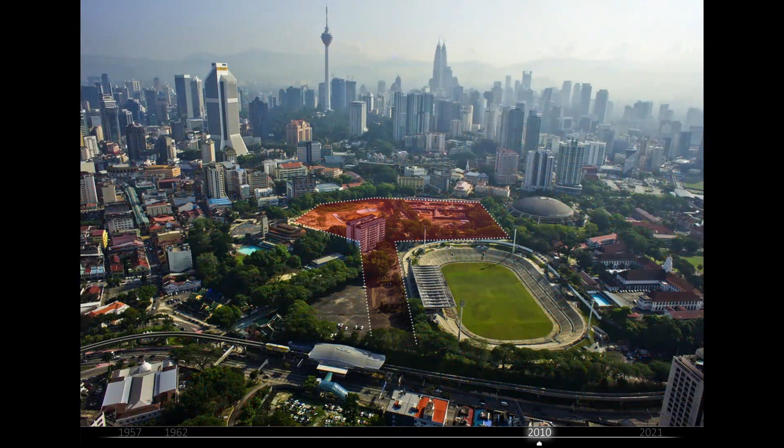But even more important to our story is Stadium Merdeka a bit further away. You'll notice it has the same name as our tower. You see that in 2010 the area was a little bit neglected for such a significant place in Malaysia, because Stadium Merdeka is where in 1957 Malaysian independence was proclaimed.

The first Prime Minister, Tunku Abdul Rahman, raised his hand to declare the birth of the nation, and our tower is meant to celebrate and symbolize this moment in the country's history. And that's why, same as the stadium, it is called Merdeka, which means independence.

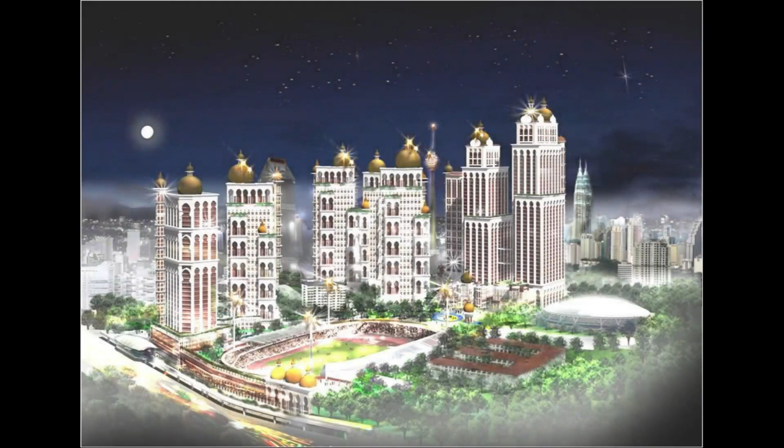Some early schemes were done for the site before us, traditional Islamic campus style, but that's not what the client wanted. The client wanted a bold statement about a modern nation going into the future, and our client is one of Malaysia's most important companies, PNB, Permodalan Nasional Berhad.

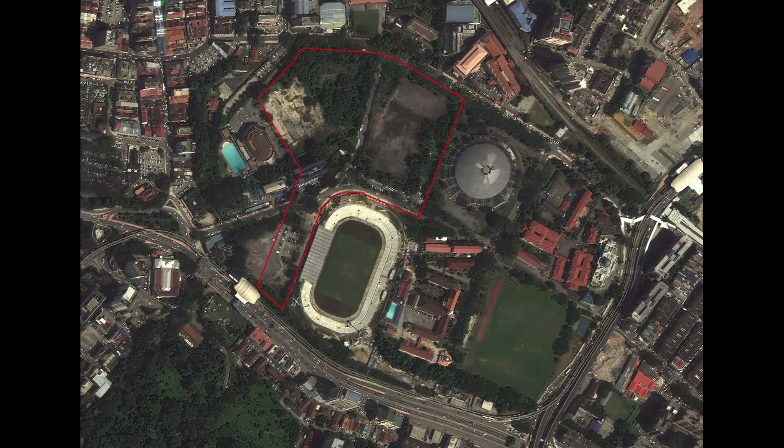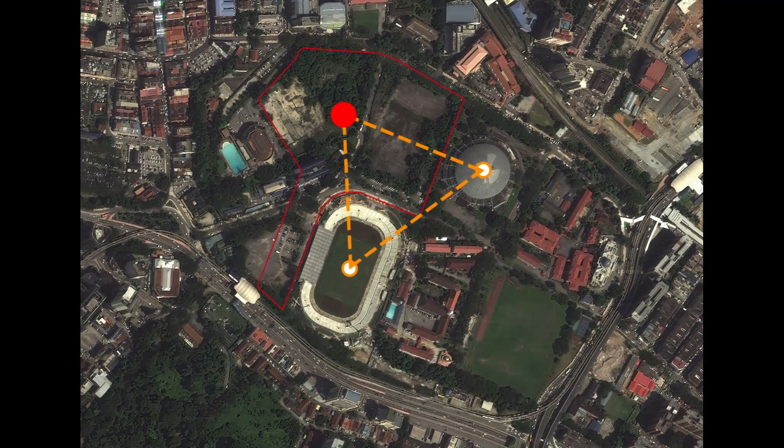So when Karl looked at the site thinking where to put the tower, he first drew this triangle connecting the two heritage-listed stadiums with the location of the future tower in his mind, and that allowed him to draw this axis towards the monorail station at south, which would become a linear park, providing access to both Stadium Merdeka and the tower. And that's the logic behind the master plan.

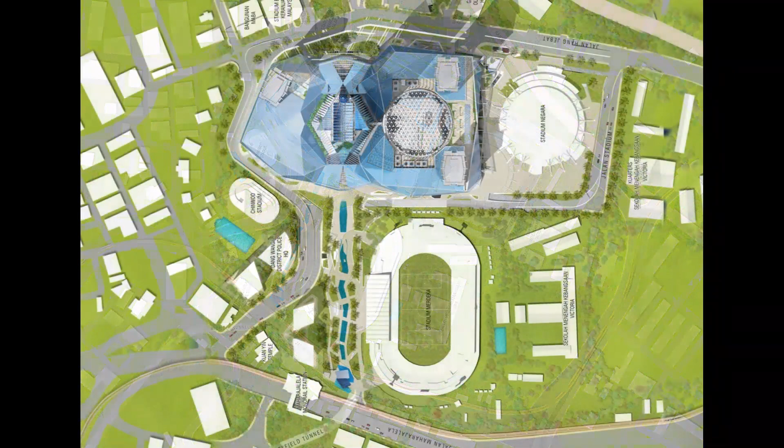We now have a purpose-built MRT station, an underground subway station, also called Merdeka, under Jalan Hang Jebat, and the already mentioned existing Jalan Maharaja Lela monorail station at south, connected to the tower by the linear park. The Linear Park was designed by landscape architects Sasaki out of Boston.

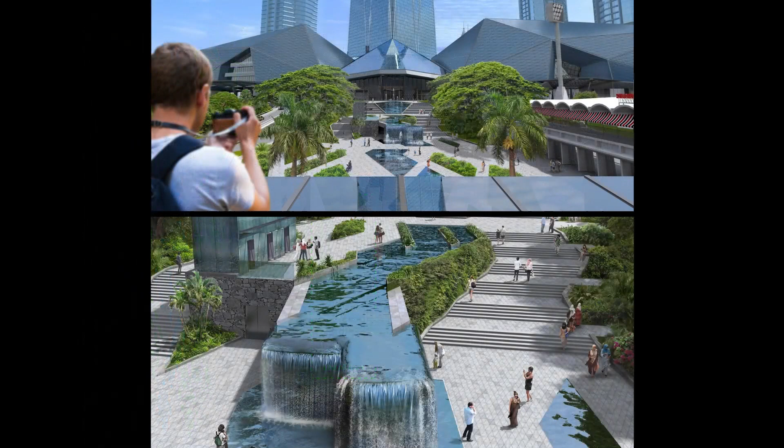Just left of the central water feature you see a beautiful young man carrying a child. I was photoshopping people into this image and thought it needed a happy father, so I photoshopped myself and my son David. Our first look at the tower in this presentation is from the south, the main pedestrian approach.

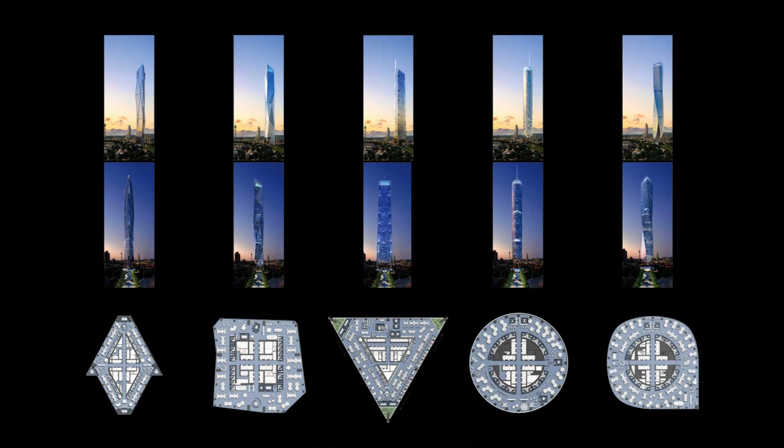For the first meeting of Karl with the Malaysian Prime Minister, we were asked to prepare 5 alternative schemes, 5 tower shapes. So Karl presented these 5 gold models and managed to gently persuade the Prime Minister to select the one on your right, because that's the one Karl wanted to do - and you know he can be very persuasive.

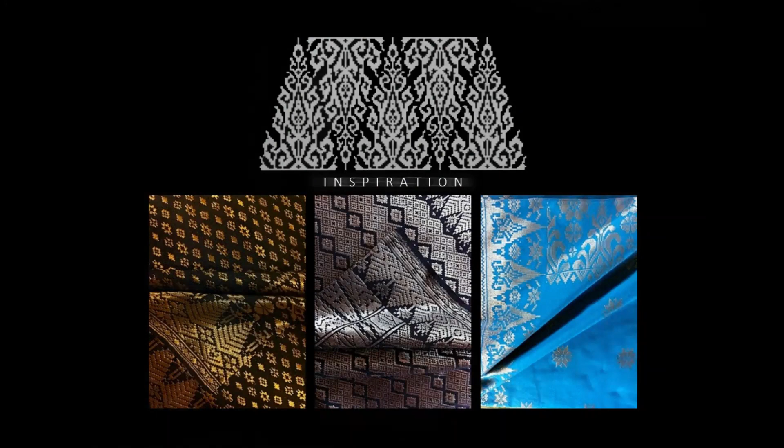We were finding our inspiration in Malaysian culture, Songket patterns of traditional Malaysian batik, these diamonds or triangles. You can see them in our facade, and that pretty much gave us our geometry.

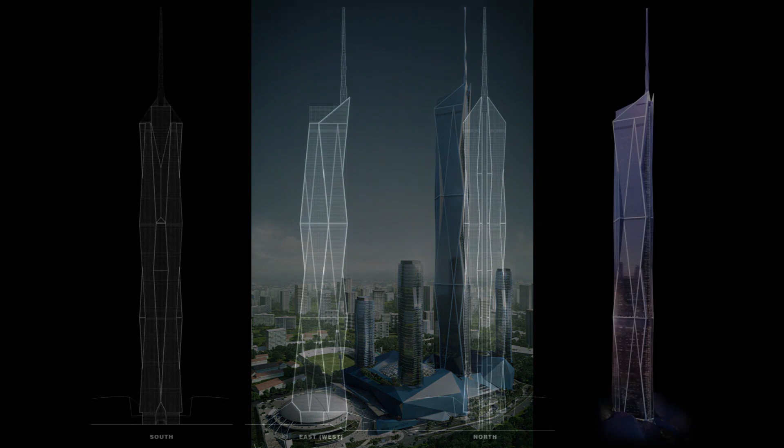This is where architecture meets structural engineering, because in our tower the structure behind the enclosure follows the same pathways highlighted in the facade.

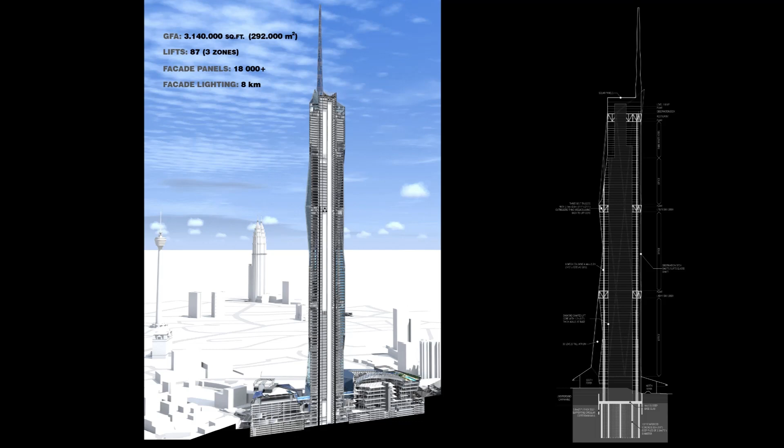Apart from Leslie Robertson, Robert Bird Group was involved, and the structural engineers of record are Arup. Classic structure for a megatall - not that I was involved in too many megatalls, it's just that during COVID lockdowns, Carol Willis, director of the Skyscraper Museum in Manhattan, organized and hosted a series of fascinating online talks about supertalls by world's leading architects and structural engineers from SOM, KPF. Carl did his talk on Merdeka 118, and here I'm reusing some of the slides prepared for that presentation.

So if we start from the tower base, we have a circular cofferdam wall, 137 sixty-meter deep piles, each 2.2 meters in diameter, then a 4-meter deep slab on top, and a diamond-shaped lift core.

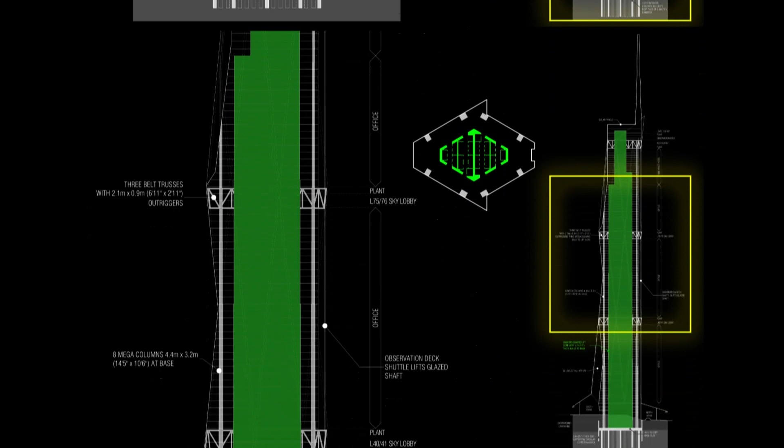Let's move further up the building. 8 mega columns, each one at the base larger than any bedroom in my house. 6 belt trusses, 3 main ones and 3 intermediate. Main belt trusses are tied back to the core by outriggers - absolutely huge things.

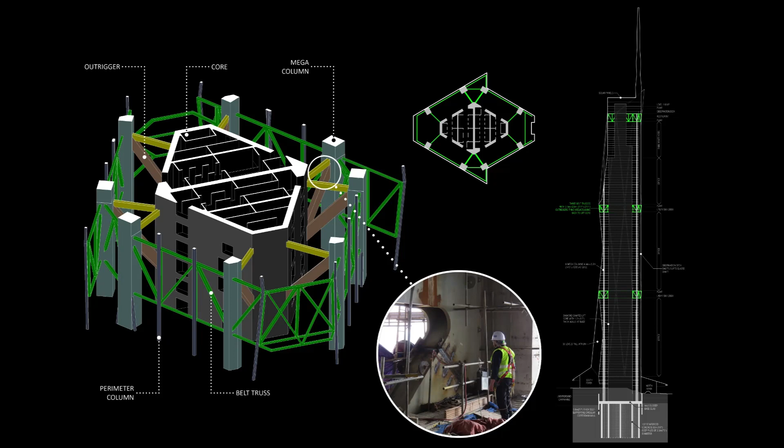There's Carl standing next to the top of one of the outriggers where it connects to a mega column. Belt truss zones are 3 levels tall, and if those were just standard office levels, the diagonal structure would be a nuisance, blocking windows, so we turned belt truss levels into transition zones.

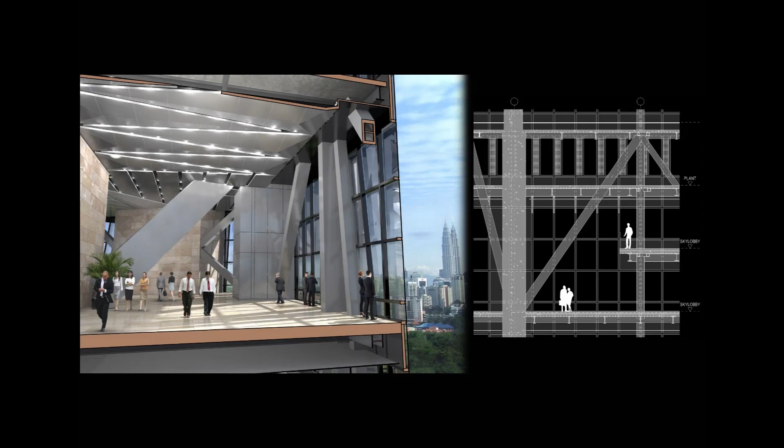2 lower levels become a double height sky lobby, where you change from shuttle lifts to local lifts. Our shuttle lifts are double-deckers, that's why you see a bit of a mezzanine in section on your right. The next level up becomes plant. There's your 3 belt truss levels.

82 levels of office. On top of that, 16 levels of 5-star Park Hyatt hotel. The reception is in a second sky lobby on level 75, so you take an express lift from the ground lobby straight to level 75 reception, and there change lift to your hotel floor.

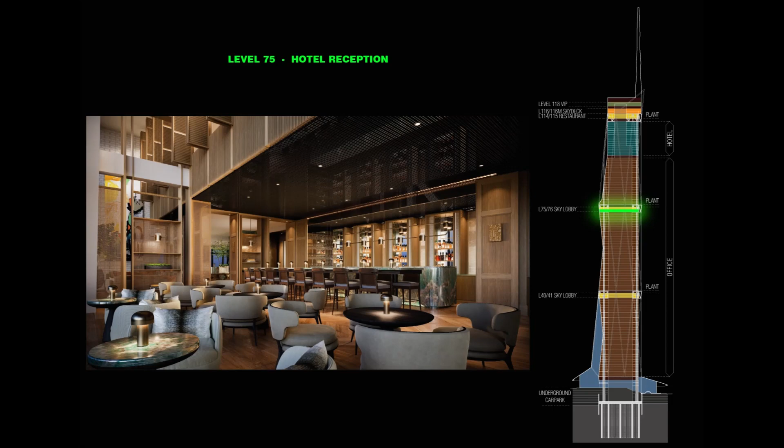The thing is, the level 75 reception is double height around the outer perimeter facing facade, so it cuts off level 76 from access to facade, turning it into an enclosed internal space for office workers from upper levels to change lifts from express to local.

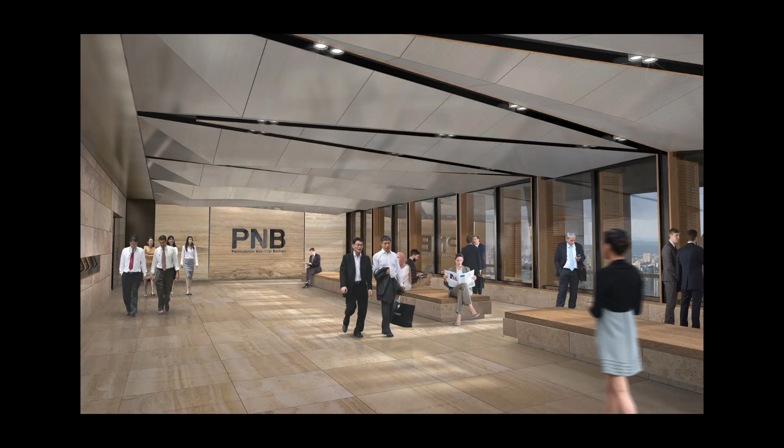But we wanted at least some borrowed natural light on level 76, so we have internal windows there, and that's where those timber shutters are attached, to conceal the windows from hotel guests below.

But people on level 76 are going to see these shutters, and timber was quite foreign to the design language of level 76. That's why Carl decided to gently introduce more timber into level 76 interiors to balance it.

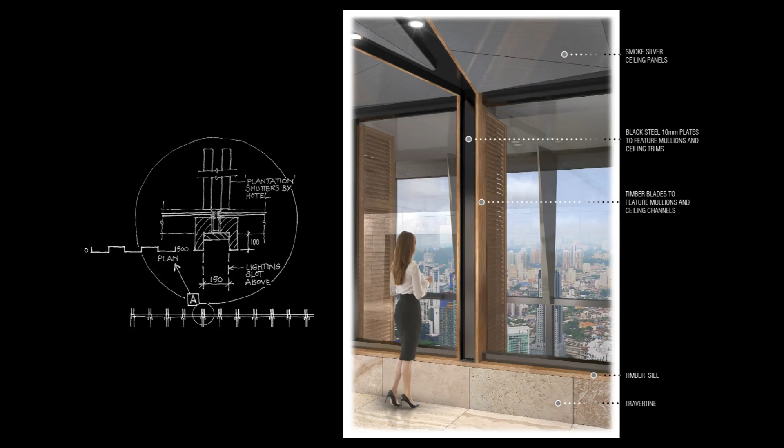And this is his detail of a feature mullion there. Every second mullion gets framed in timber, which continues onto ceilings and sill. More timber goes into the seating area.

We are in a side wing of the tower, the only place where level 76 gets access to actual facade. This is a mid part of an outrigger. On a level below it will connect to the core on your right, and on a level above to a mega column on your left.

One of the solutions to the mind-your-head issue under the slope: that planter and a bench. Anyway, just a fragment of level 76 interior design study. I told you I was going to show random bits and pieces.

On top of the hotel levels, we have 2 levels of restaurant and then a large public observation deck. 2 dedicated lifts at Tower North, highlighted in plan and section here, will take people from ground straight up to level 115. The external wall of the lift shaft is glass, so you will fly up into the KL sky over the city in front of you, disappearing below, because northern views are city views with Petronas. This will be a spectacular ride.

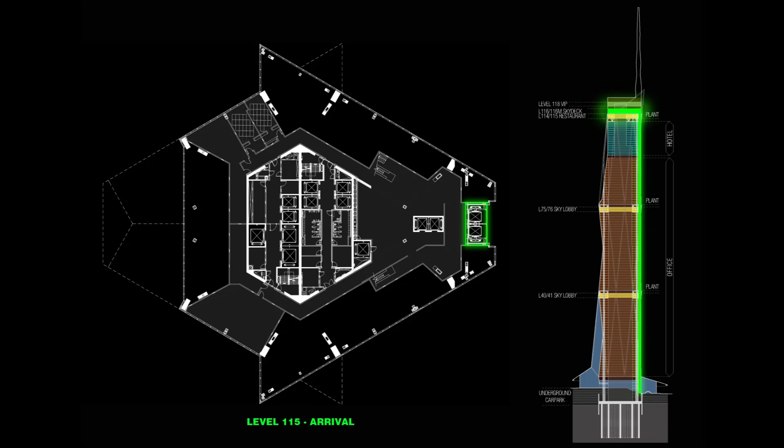Once on level 115, you'll take an escalator up to the main sky deck, level 116, where we have 2 open terraces. And the next level up is thrills - I'm not sure how much of it is officially public knowledge yet, so let's just leave it at that. A quick section showing how the top levels work.

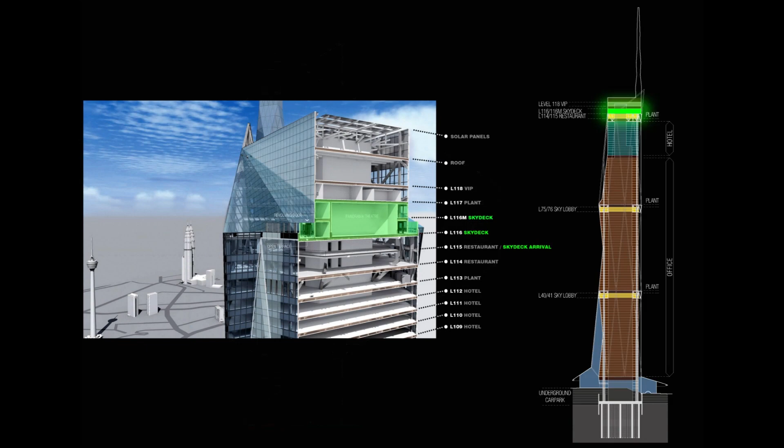Now let's move down to the tower base. There's a 10 meter difference in height between lower ground level at north on your right and upper ground level at south on your left. We have 2 main foyers at north and south, and 2 side galleries around the tower connecting those foyers. Works like this.

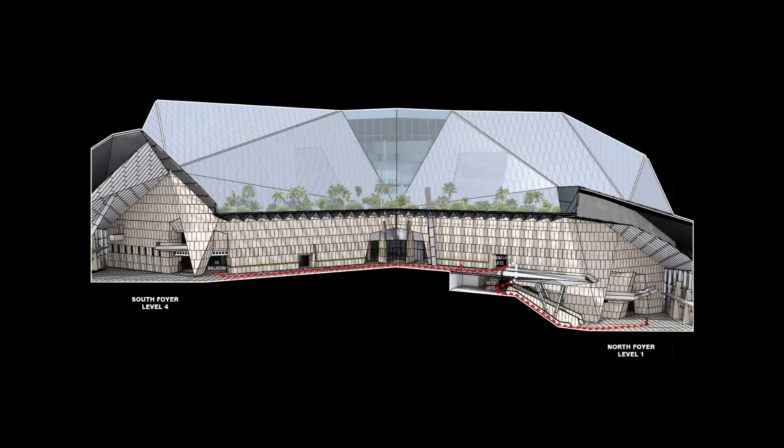Zigzaggy roof over the gallery is half glass, with a roof garden on top. I'll show you more slides, but first let's have a quick look at foyers. Tower drop-off is on your right from Jalan Hang Jebat. Office entrance on your left, hotel on your right. So what's inside, behind the facade?

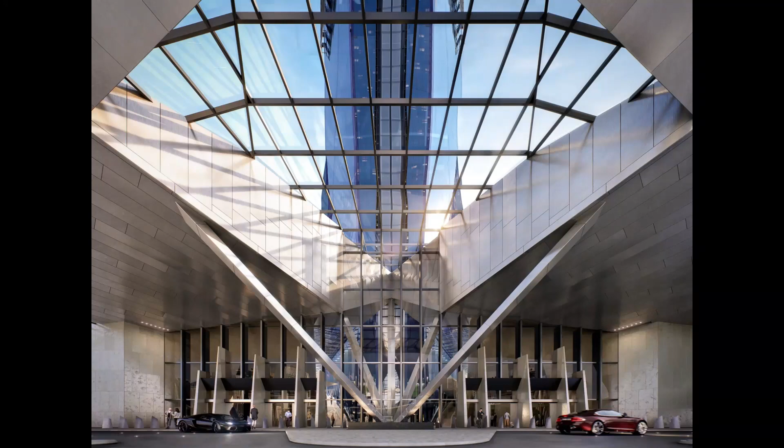Karl told this story in a couple of his international talks. Designing foyers, he was inspired by Malaysian nature. He loves it and spends half of his holidays in Langkawi. He also traveled through Borneo and was taken by the Gomantong caves - stone walls, sunlight from above, water dripping down those walls. That's exactly how he designed our foyers.

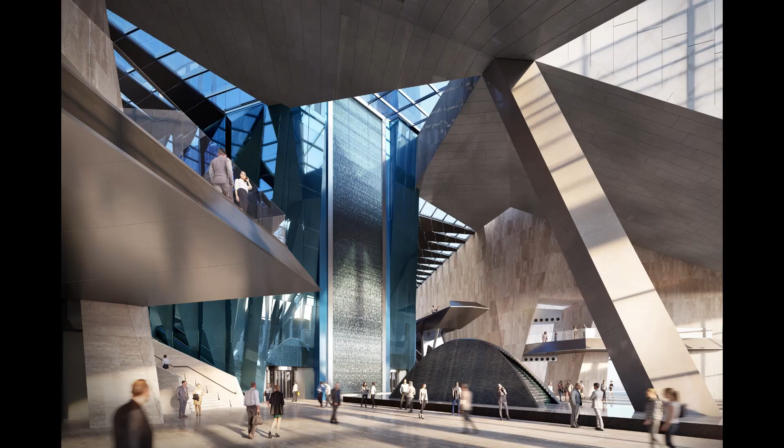Stone walls, sunlight from above, water dripping down - the water feature by fluidity out of LA. Two observation lifts take off and land behind this wall of water. If from the same spot you look left, you'll see stairs and escalators taking you to upper ground level. That balcony will accommodate a little cafe, with a separate stair taking you there.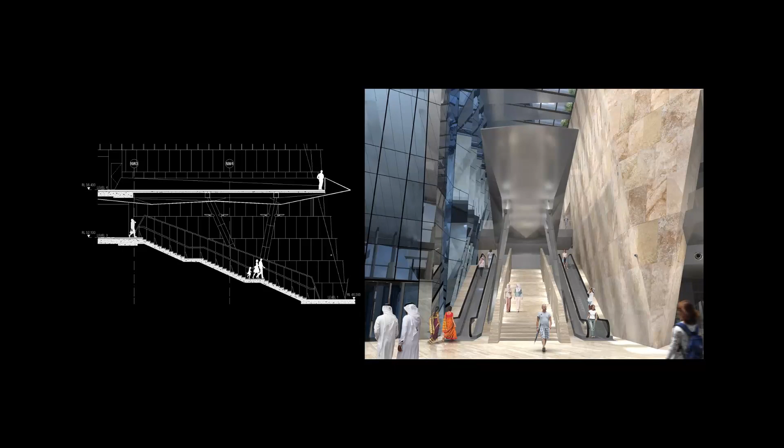On the opposite hotel side of North Foyer, separated by the water feature, over a stair up to the hotel lobby, you see a soffit of a viewing platform. Carl calls it Widow's Walk, from upper ground level overlooking the lower ground foyer.

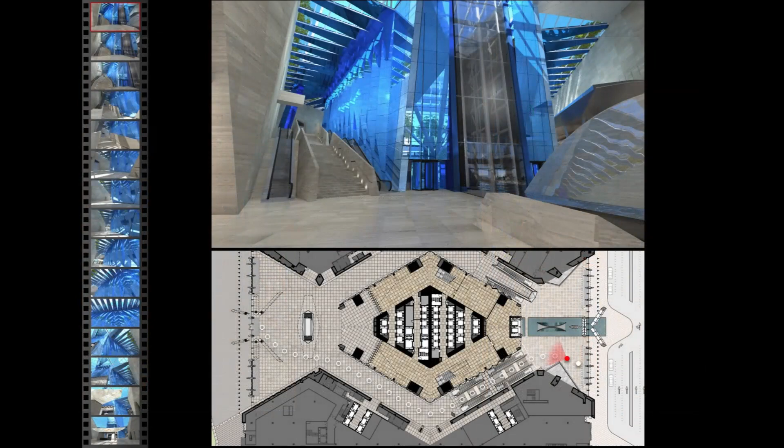Just some stills from a very early animation illustrating the journey from lower ground to upper ground, up the stair, through the side gallery, looking up through the roof, seeing the tower above and a roof garden, and we are in South Foyer. That structure at center is a welcome desk.

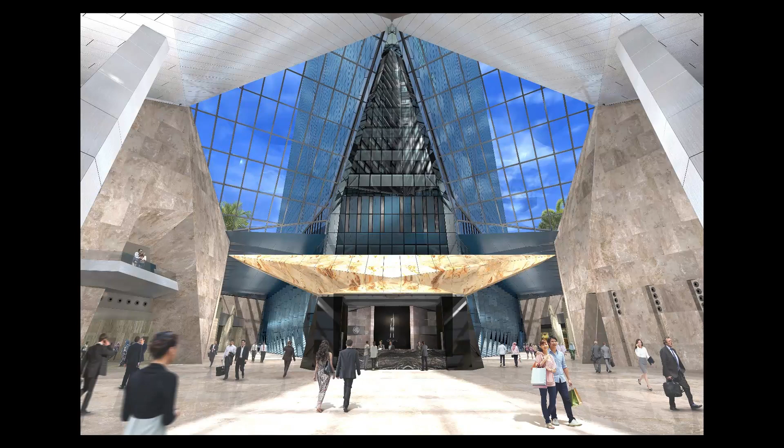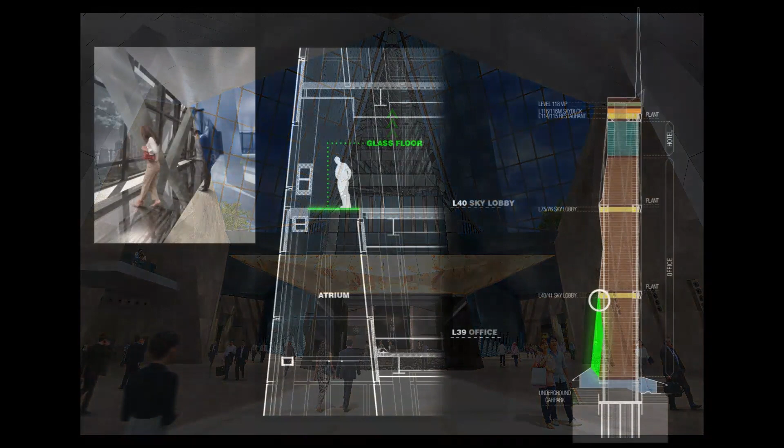We call it Minangkabau because the highlighted roof was shaped after the traditional hat of the Minangkabau people in Malaysia. Arrows point at our south atrium, open all the way up to the first sky lobby, and on top of it we have a bit of a glass floor on level 40 from where you can look 36 levels down.

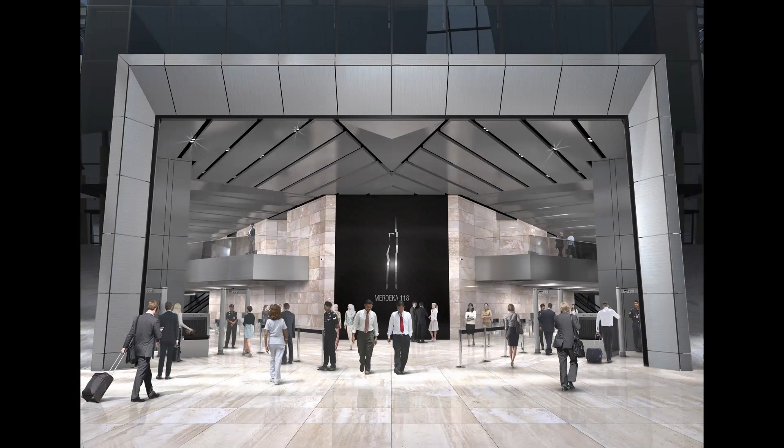If you walk around Minangkabau, you'll find yourself in front of the office entrance. Here we were thinking about locating security equipment - walk-through metal detectors, baggage scanners. Unfortunately they will be installed permanently, not the most beautiful pieces architecturally, but that's life, so we needed to make sure it will all work with queuing at peak hours, etc.

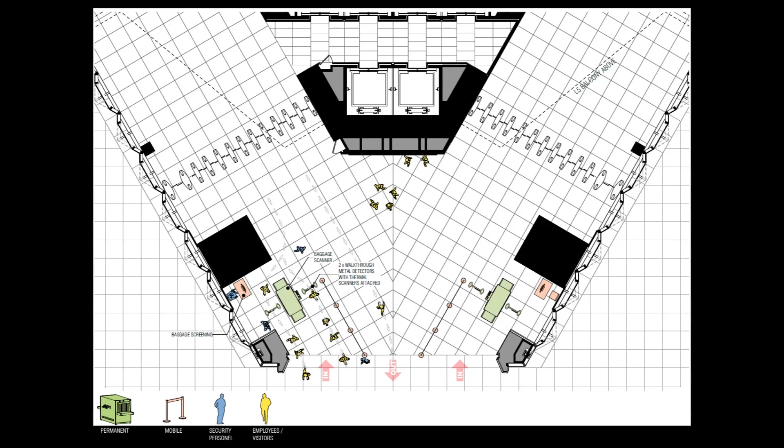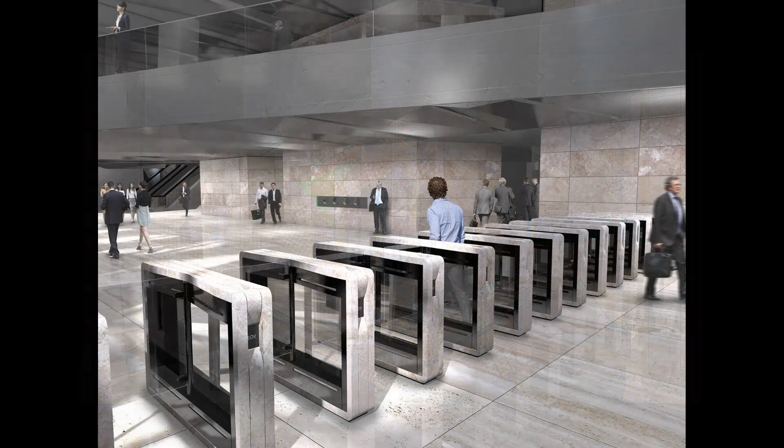More security equipment - turnstiles. We received specs from all flip barrier manufacturers competing for this job and modeled each option in every detail to compare. Of course it's not only about the looks, it's also about performance, about the speed, response time from the maintenance team, but looks are important as well. This option from Boon Edam was everyone's favorite, although I quite like the one with travertine housing as well.

Moving further in, another good example of how 3D cutaway sections come in handy to describe crowded complex spaces - this cut through the side gallery.

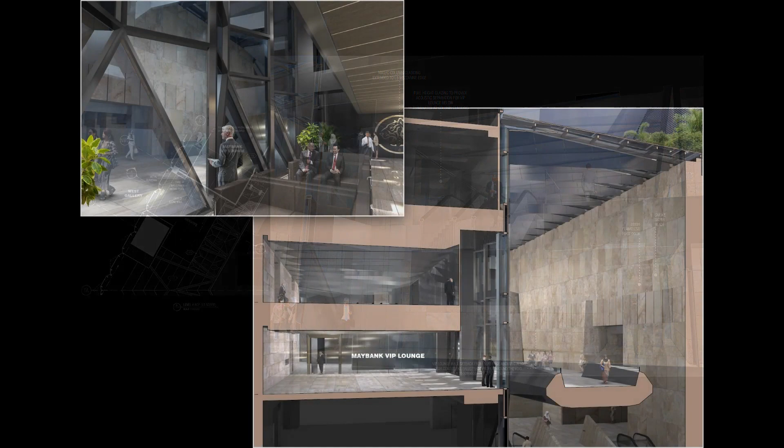Anyway, so far we've been looking at the tower itself, but we will also have 2 podiums on each side, and in future 3 residential towers that will grow out of those podiums.

The larger podium at east is a retail mall, well under construction now. I'm personally spending my days reviewing shop drawings submitted for construction - revise and resubmit, revise and resubmit. The smaller podium at west will accommodate a ballroom for Park Hyatt, an auditorium, gallery, and wellness center. We're just about to move into DD with the gym, so it's pretty much work in progress still.

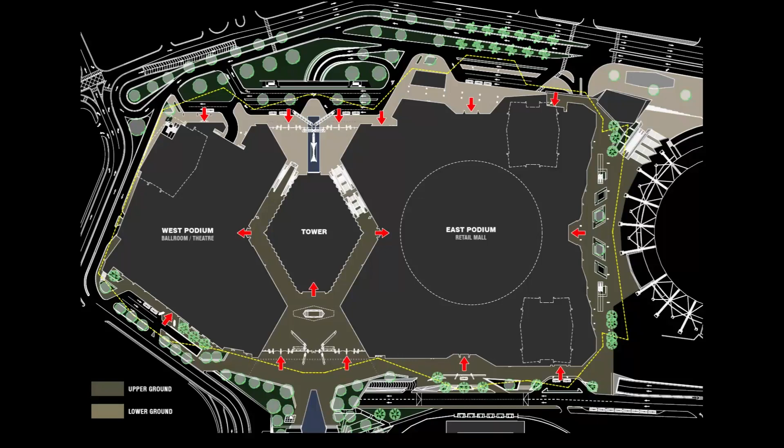I'll show you a couple of examples. Red arrows represent public entry points, showing how transparent and accessible to the general public the development is. The yellow dotted line shows the extent of shelter above, to make sure people will be able to walk around the building without getting wet, which is important in KL.

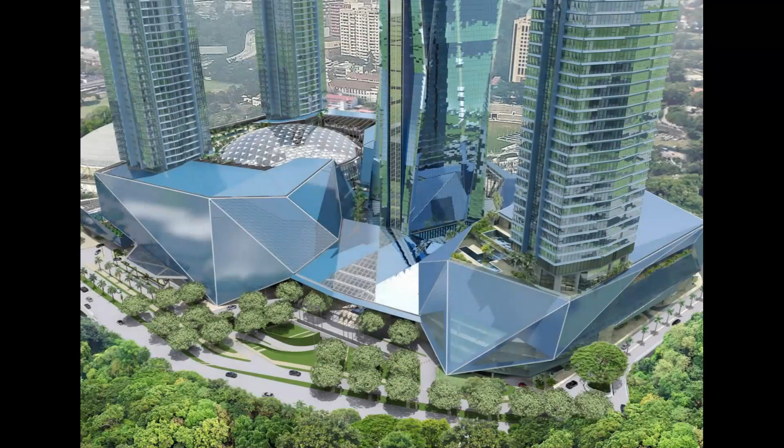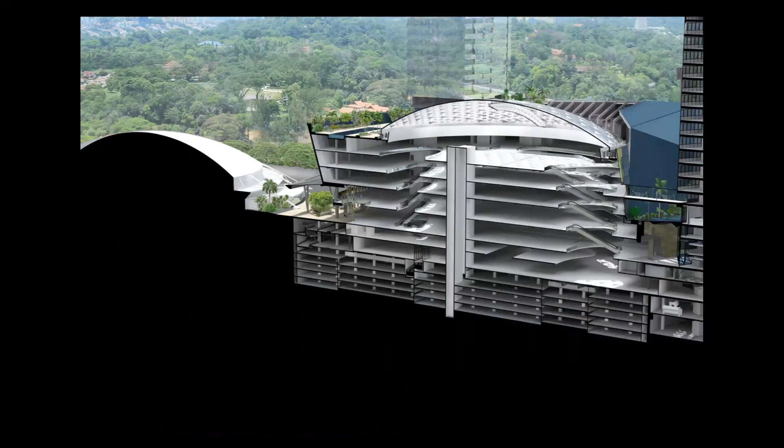So, the larger podium on your left is a retail mall. Let's have a closer look with the help of my magical 3D cutaway section. I'm not going to bore you with statistics - the main feature of the mall is a self-supporting 88 meter diameter glass dome.

This diagram illustrates that strategically placed escalator voids below will ensure sunlight penetrates all the way down, and we will see the tower through the dome. But how do we clean the dome glass from below and change the lights?

An obvious solution is to use those telescopic arms spider legs units, but you need to store it somewhere and a pretty big lift to take it to the top level. Technically speaking, this should have been Baken's problem, because for the mall we designed building envelope and they designed interiors. But Baken's, they are great artists, you know, inspired by nature, fallen leaves and all that, so we were the ones to make sure it all actually works.

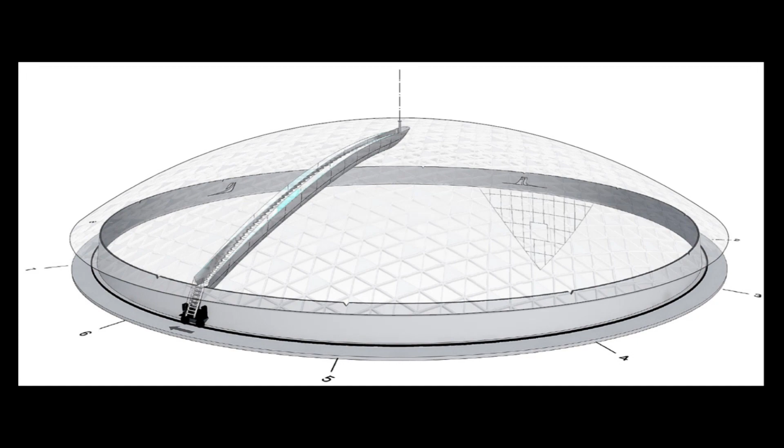And Gerard suggested a very interesting solution, this maintenance gantry. One end would be attached to dome center as a pivot point, and the other would slowly travel around the perimeter, making only 2 full circles a day, as if the dome was a clock face and this gantry an hour hand, if you look from below. And it could actually show time. This would have a symbolic meaning, as there used to be a sundial, much loved by locals, that had to be relocated to give way to construction. So we would be kind of giving the sundial back to community in its new reincarnation.

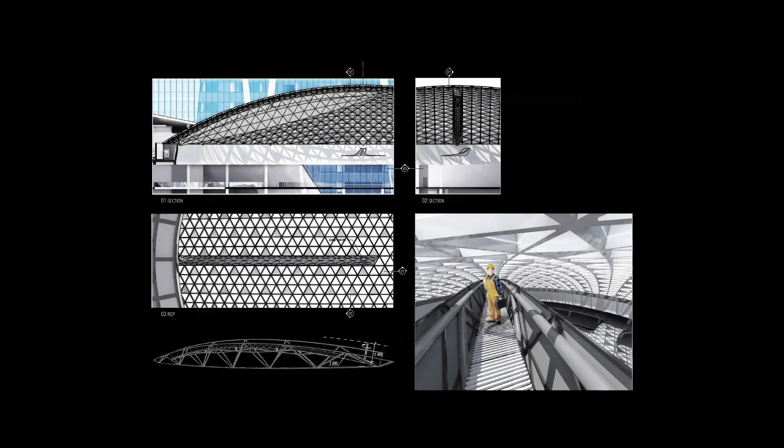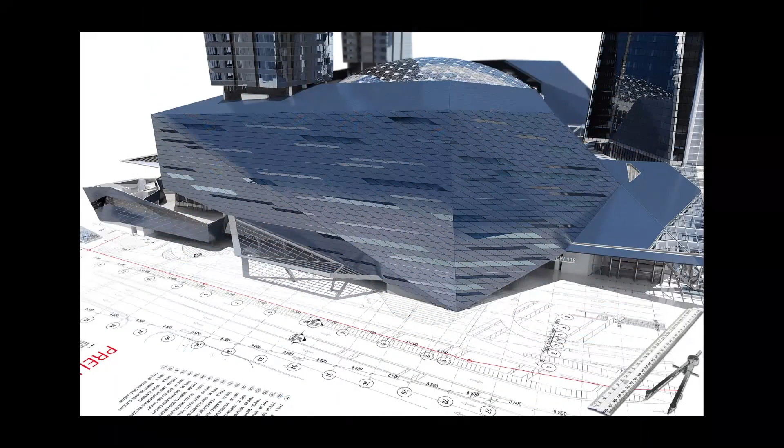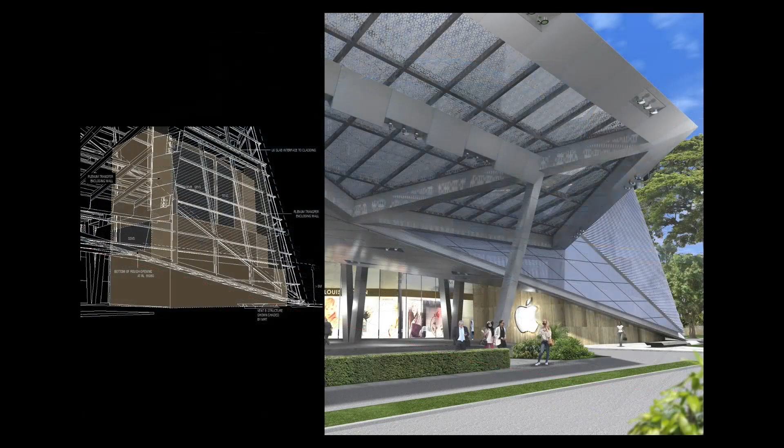Now, there's been many physical models made for this project, in all possible scales and levels of detail. What's different about this one is that this is of course fake, computer generated, just for fun, but the reason I'm showing it to you is that it very clearly shows our north touchdown point, where shell comes to a point to touch the ground. And it is actually not just there for looks, it's absolutely functional, concealing one of ventilation shafts from the underground MRT station. A good example of how, out of these technical difficulties, interesting designs are often born.

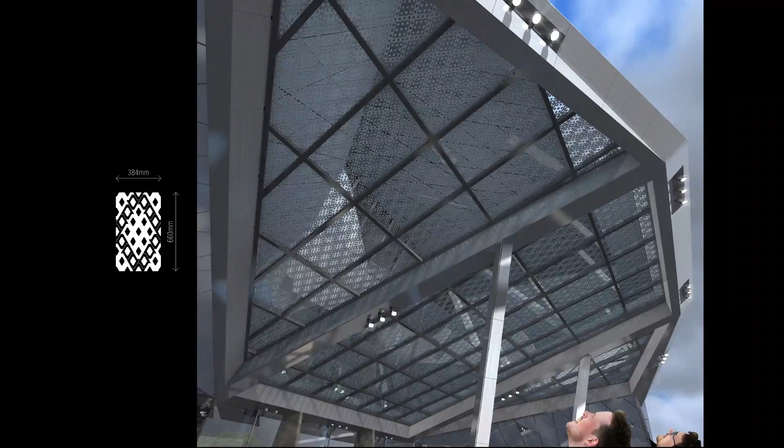One other thing this image shows is a frit on canopy glass. We, and I mean Shem, designed this frit pattern out of little typical tower floor plates, see on your left. And in this exercise we were looking at different scales for it to make sure it casts nice soft shadows below for a subtle Islamic feel.

There are 2 ventilation shafts out of the MRT station below, one behind the touchdown and the other one concealed by that little balcony on your left, which is not really that little. It will accommodate management office, provide access to one of future resi towers. There's a lift inside. The tricky bit here was that structurally we were not allowed to transfer any load on top of the station below, so all that had to be cantilevered, and different design options for this balcony were all to do with different ways to support it.

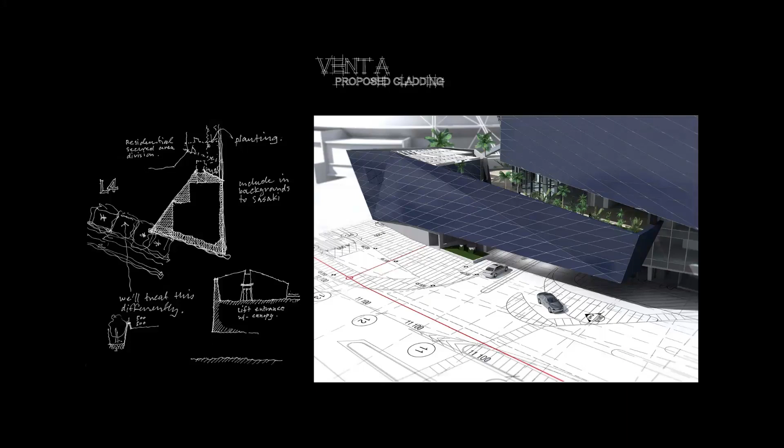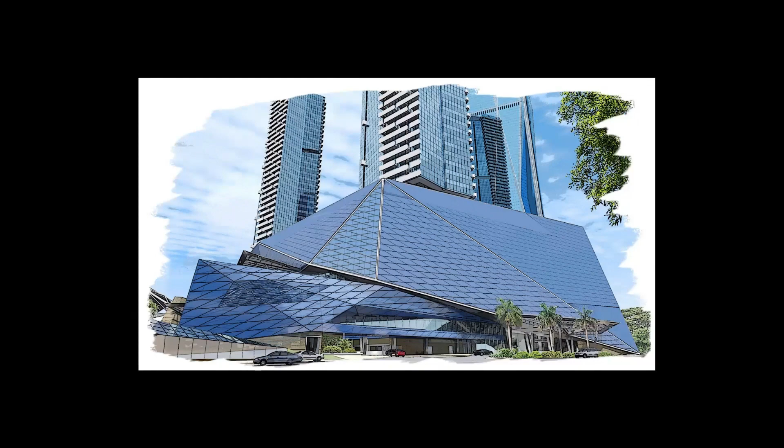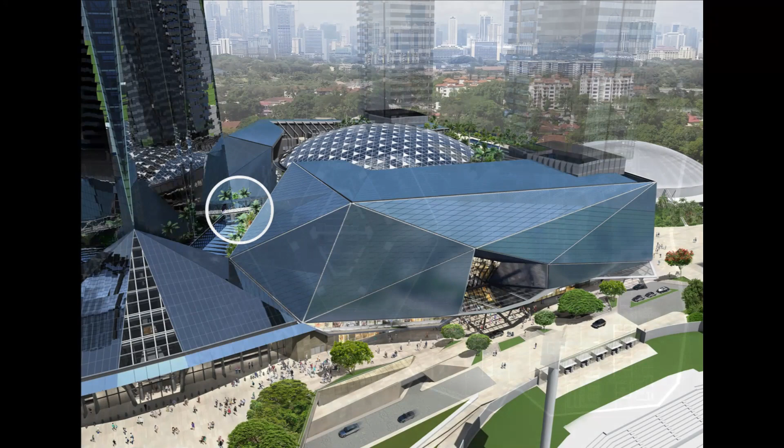We're now looking at the mall from the opposite, south side. I talked about this glass bridge at our last leadership conference. For those who were not there, the main access from tower into the mall is at ground level below. This bridge is only for visitors of tower observation deck. On their way down, they will be forced to walk through this bridge into the mall and leave all their money there because there will simply be no other way out for them.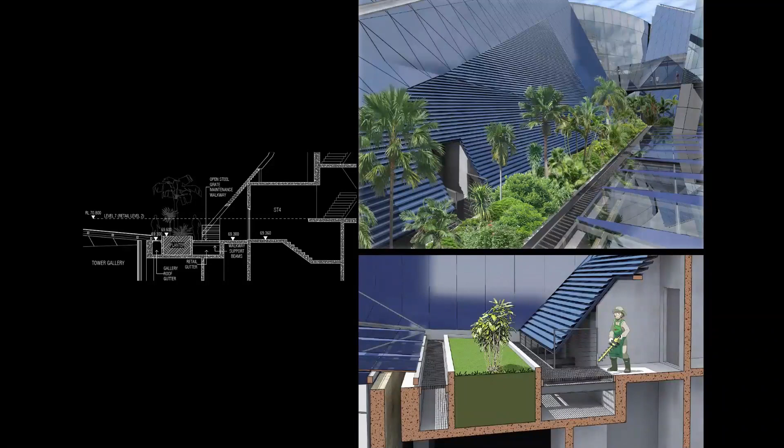Let's talk about roof gardens. We have them on both sides of the tower. Here's a roof garden between tower and the mall. You can again see the glass bridge at the distance. 3D cutaway section at the bottom of the slide shows a typical cut through the garden. The guy with a chainsaw, he's not a maniac, he's a gardener on his way to look after the garden.

But there's a 2-meter wide and 1-meter deep gutter between them to collect all the water from podium slopes facing the tower. Because when it rains in KL, it really rains. So that gutter had to be walkable, and in this exercise we were designing steel mesh panels on top, some of them hinged for maintenance access.

This is a roof garden on the opposite, west side. As I said, west podium is still work in progress. This image shows one of the options we looked at for west podium's central part facing the tower, an open roof terrace.

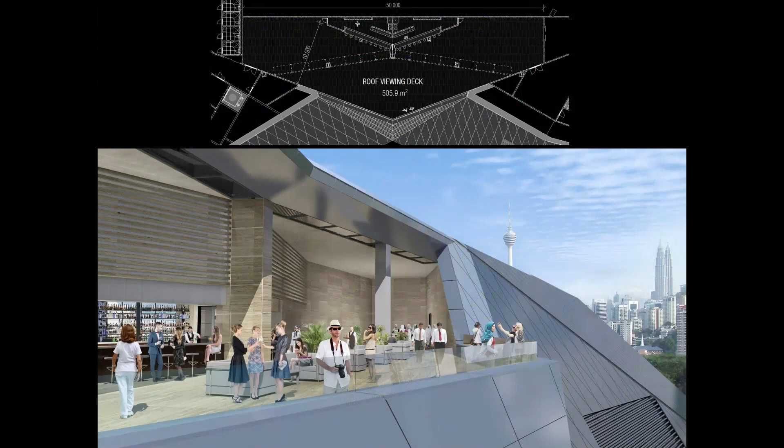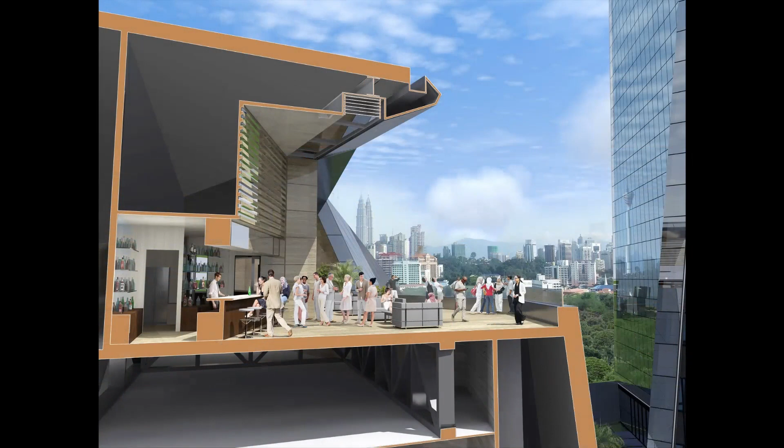It would have a bar and be accessible by main tower employees and west tower residents as well. It would have great views, complemented by roof garden below. Yet another 3D cutaway section illustrates how typhoon shutter skyfold wall would be concealed in a ceiling, and terrace would be supported by large trusses because it is partly over a column-free ballroom below. Terrace would have rather interesting tower views directly from below.

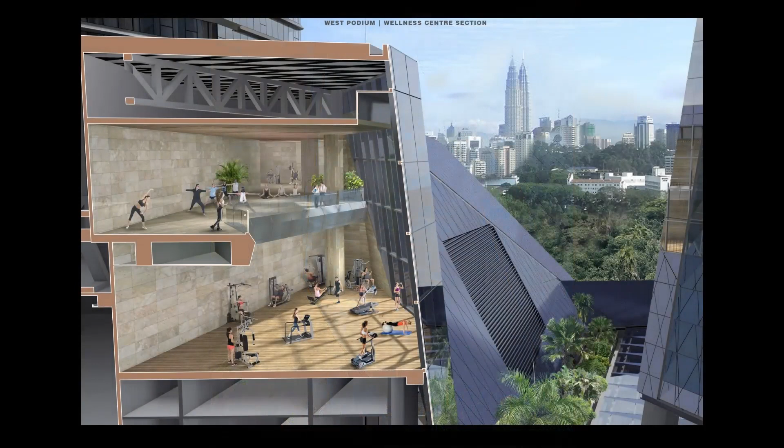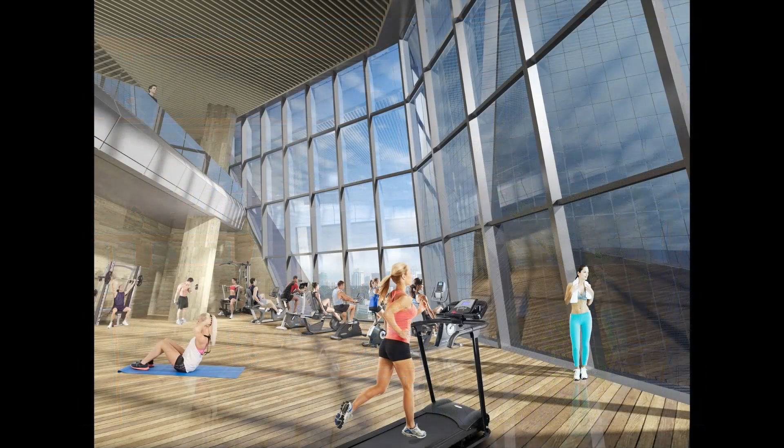So that was one option for this area, and another alternative option was not to have an open roof terrace, but instead, and this presentation should have been called a power of 3D cutaway sections, instead to glaze two central facets of the enclosure and create a large double-story gym behind, because we need to have a wellness center with squash courts, badminton, sauna and a large gym. This would be a truly spectacular gym, but neither of the options are going ahead, so next time I'll show you what it is.

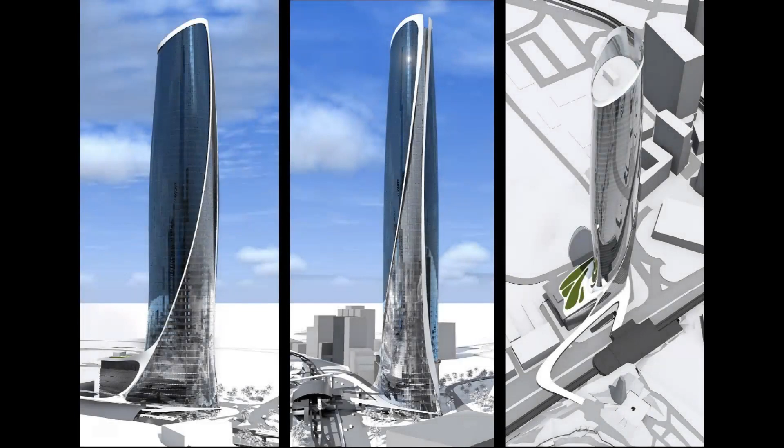And the last thing I showed in this presentation was an old feasibility study from 2014 that we did for one of the adjacent sites. It was a rather technical study to do with some underground works and infrastructure to see if it was potentially structurally possible to build a tall tower on that site in future. So we didn't have to actually design the tower, but Jared asked me to sketch something exciting, using his words, to whet their appetite. And I got all excited myself and stayed all night in the office, our old office, didn't go home, didn't sleep. And by the morning, a sheet of paper with these 3 images waited for Jared on his desk.

It was 2014, Zaha was still with us. Those pedestrian bridges at Tower Base, one connecting it to monorail station and the other going over the monorail to Linear Park, gave direction to the whole geometry. So in the morning, people started coming in. Jared came. For those who know Jared, he's not easily impressed, but this time he was visually pleased. He grabbed the paper, took it to the window, and was standing there for at least 5 minutes looking at it, smiling and nodding his head. I prepared myself to finally hear from him that I'm the greatest building designer he ever met. And he eventually looked at me and said, so that's what modern computers can do. Oh well.

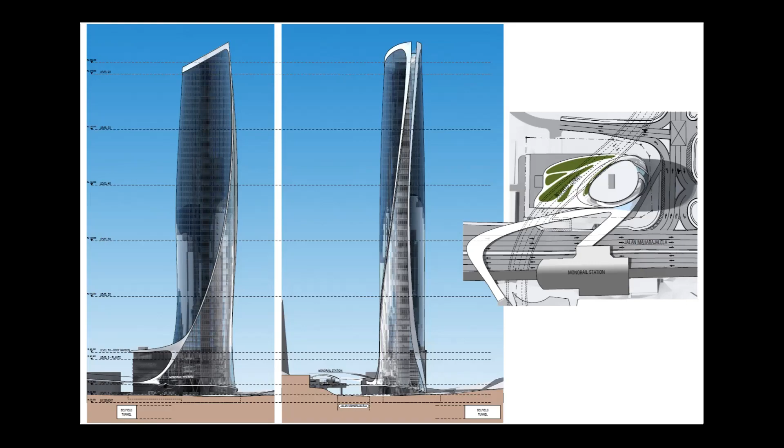The reason I included it in the presentation was to talk about a Rhino connection and to make a point that this was almost the only time in the whole project when we designed and modeled something not directly in ArchiCAD. Remember, I was sponsored by Central Innovation, so I was selling ArchiCAD like there was no tomorrow. Back in 2014, communication with Rhino was rather basic, but now it's just a walk in the park, and my beautiful watercolors here, as fake as that physical model.

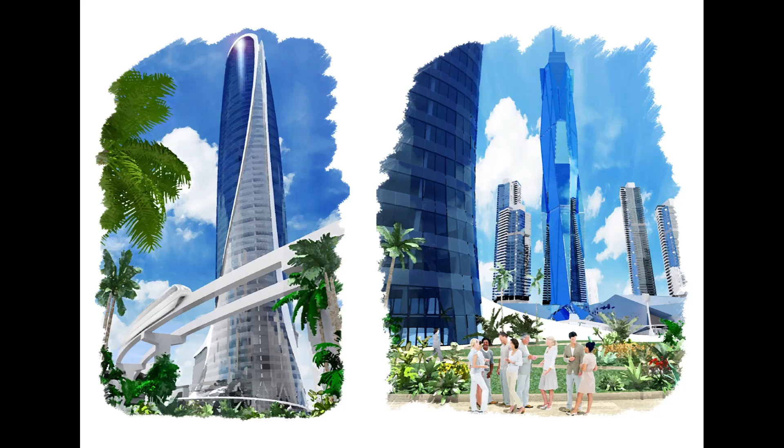Then I showed photos of some key moments in construction history from 2015 till now, and said a few words about project team, giving a special mention to RSP, local architects who documented our tower design without any distortions, great professionals, pleasure to work with. Another local architectural practice, GDP, documented our retail mall design, also a big thank you. We were blessed with an amazing project team.

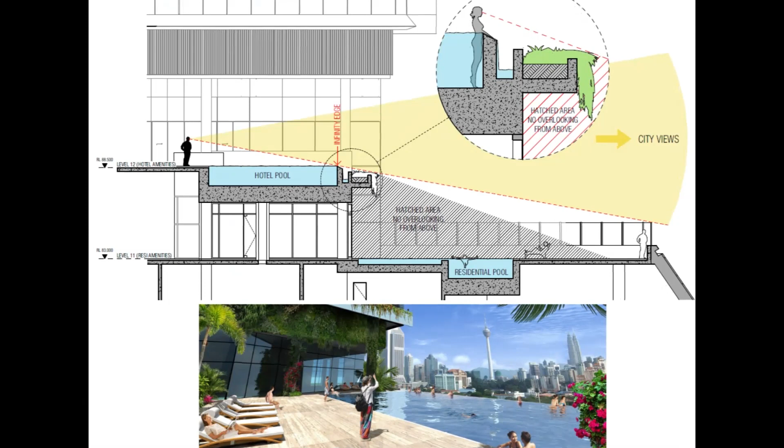And this wraps up my report to FK staff about the first half of our presentation at the BILT ANZ conference. Of course, it only included less than 1% of interesting materials we could show, little chapters in our design journey in this project. Over the years, I've done a few little talks in the office. In October 2018, at our Melbourne staff meeting, after Hussein and Munya showed their animation for West Podium. Then next year, at one of our Design Dialogue Wednesdays, we discussed locating various devices, like beam smoke detectors, in tower foyers. We are actually now revisiting that with Gerard, having a closer look at some cases where those devices cannot be concealed in slots and niches, finding elegant solutions.

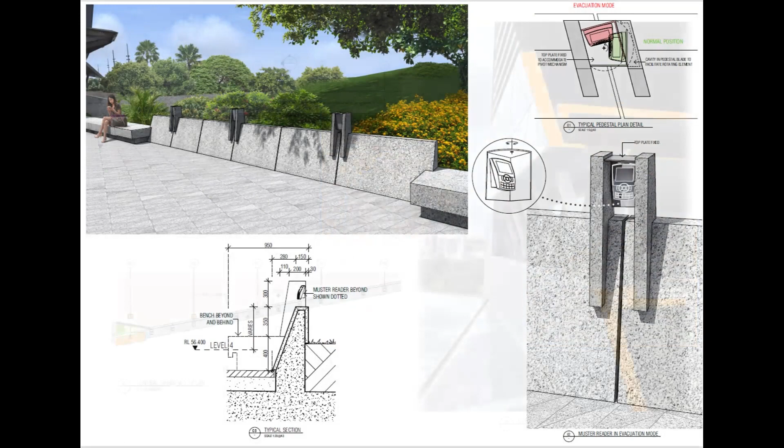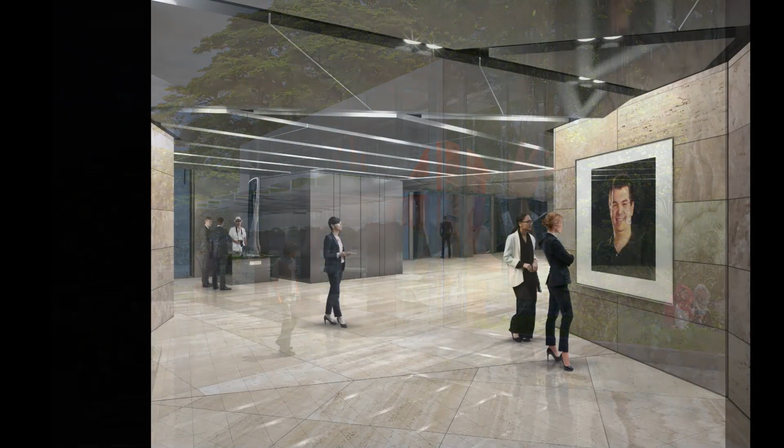When the tower topped out at the last staff meeting of 2021, I showed a few studies happening at the time, like these muster readers used in case of evacuation, Niagara Place balconies, 3D anamorphic distortion screen study for Linear Park, PNB Museum on level 4. And there is so much more left behind the scenes. Our design journey in this project deserves a big book, but we are still writing it.

And talking about books, if you haven't heard yet, CTBUH recently released 118 Tallest Buildings book. I was assisting Carl in collecting materials for it. 118 instead of the usual 100, obviously in recognition of our tower, and it is sold for $118.

I will now record a second half of this report back to staff about the conference, covering ArchiCAD and BIM related part of our presentation there, and also questions and feedback I received.